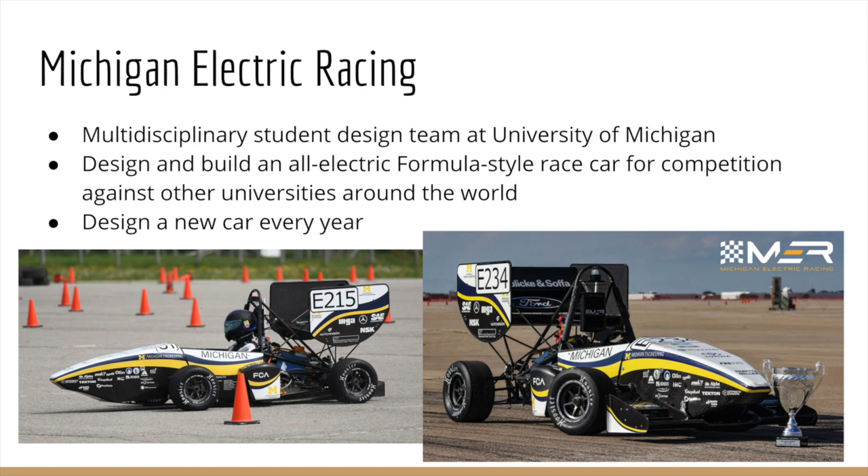As I just mentioned, I've been a member of Michigan Electric Racing during my 4 years at U of M. We are a multidisciplinary student design team that designs and builds an all-electric formula-style race car for competition. These two pictures are a car last year, and this is just to give you some more context into how I've spent my time at U of M. On that car, you could see the outer surfaces, and those were all of our composite parts.

But some composite basics. So the composite material is raw carbon fiber, and we use a woven sheet, like the picture you can see on the right. And then the other part of the composite is the epoxy, which in our case is a two-part glue. This holds the carbon fiber sheets together. For manufacturing, we layer these sheets on top of each other, and often we vary the weave direction, and then we use vacuum pressure to help cure the epoxy that we mix in between these sheets.

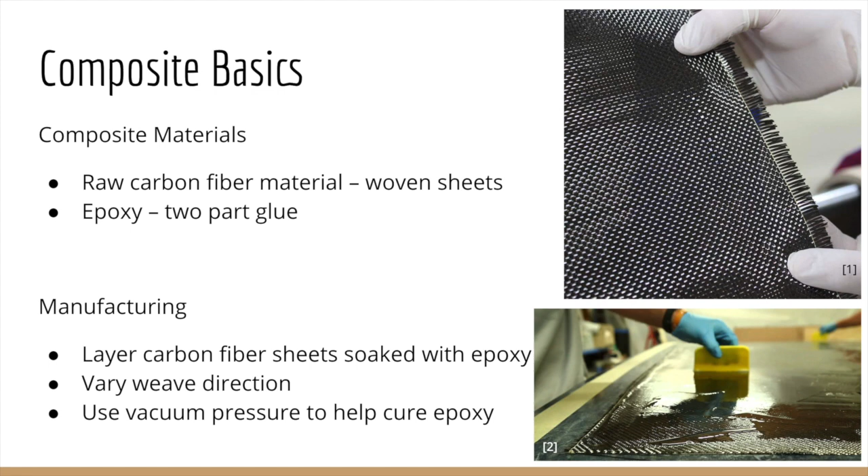A ply is a single sheet of this carbon fiber material, and then each ply has a different weave, which is the pattern and orientation that those carbon fibers are woven together. The composite is the full plies that are stacked on top of each other with the epoxy to make the final material. Material properties of a composite, specifically carbon fiber, are a little bit different than most materials.

They carry load most in their fiber direction, so along each specific carbon fiber. And then it's reinforced with the epoxy. Carbon fiber is lightweight, stiff, and then you can vary the weave directions to optimize the strength, and that's what this project focuses on.

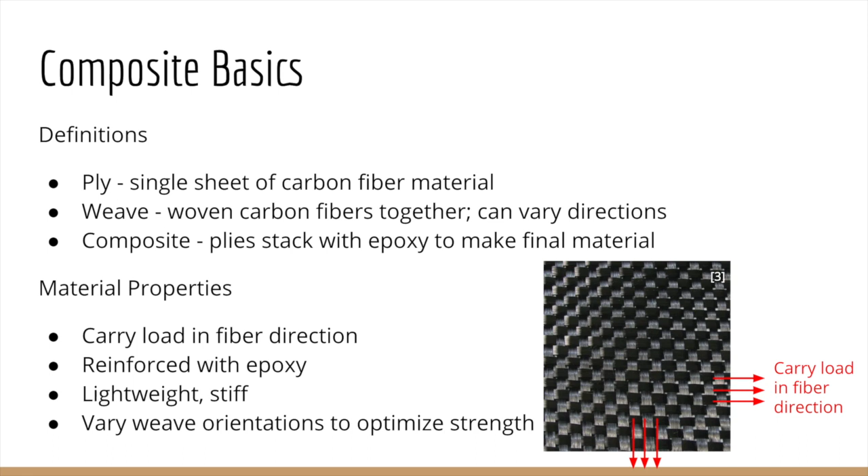For a carbon fiber layup, we are going to take different plies, like I mentioned before. So we have the 0-90 orientation, and then we can lay a 45 orientation, then a 0-90, and then a 45 on top of each other, and that's a 4-ply composite. And varying those weaves is what I look into for the rest of the duration of this project, and what I'll be going into in more detail.

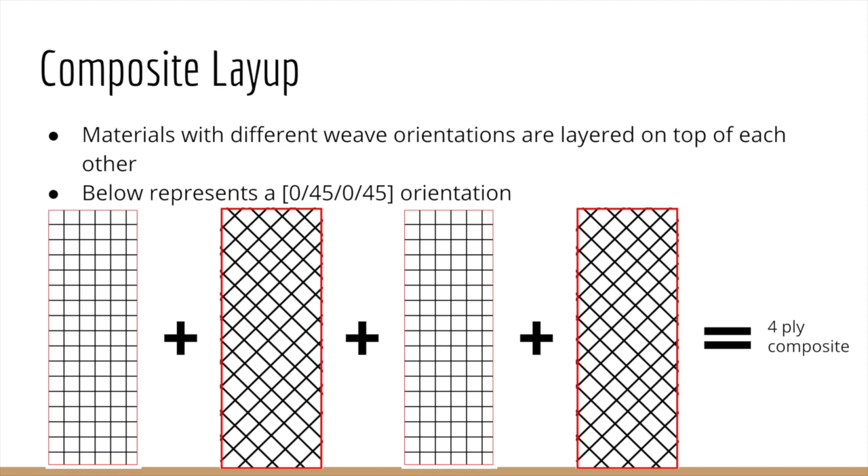Michigan Electric Racing composites: as I mentioned before, you can see the composites of the aerodynamic components of our car, or the outer surfaces. Those are less structural though, because we have a steel chassis frame beneath it. The structural composites include the steering wheel, the pedals, the steering column, and the seat, and those all have to be really strong, but we want them to be light, which is why we make them out of these carbon fiber composites.

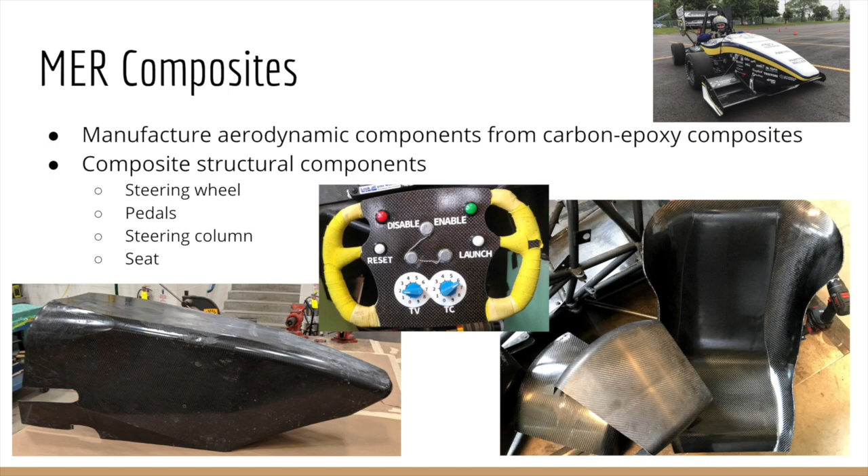As a little bit more background into why I chose this capstone project, I took a lot of composite structure classes at U of M, and it became something I was really interested in. I was interested in the strength and material properties of these components and how they can apply to our design. And I just had a personal interest in figuring out the material properties and part optimization that come with this.

Also, I was really involved in the past manufacturing for Michigan Electric Racing, and we didn't take that much consideration into the strength of our components or the weave orientation to optimize them. And I'm looking to get a significant strength increase with alternating weaves, and I know that our team is able to accomplish this, and I want to help push them into that direction. My faculty advisor for this project was Professor Heath Hofmann. He's the Michigan Electric Racing faculty advisor and our MDP course coordinator.

Initially, my capstone project plan was to do a lot of physical testing. I wanted to manufacture samples of different composites with a lot of varying weave orientations, so 0, 45s, also including some 60, minus 60s, in a lot of different patterns, and then conduct physical testing with a 3-point bend test on all these materials to see how the strengths of them compared to one another.

I wanted to develop a data book for the Michigan Electric Racing team to see which materials were the strongest so we could manufacture with those in the future and reduce the weight of our components. If we can make our components stronger with less material usage, they will then be lighter and better for the optimization of our team.

I wanted to also offset this with some simulation software so that we could validate which orientations we were using in the software before we manufactured it. I wanted to verify the component simulation with some additional physical testing so that way I could correlate the results I was getting from the simulation and the physical testing results.

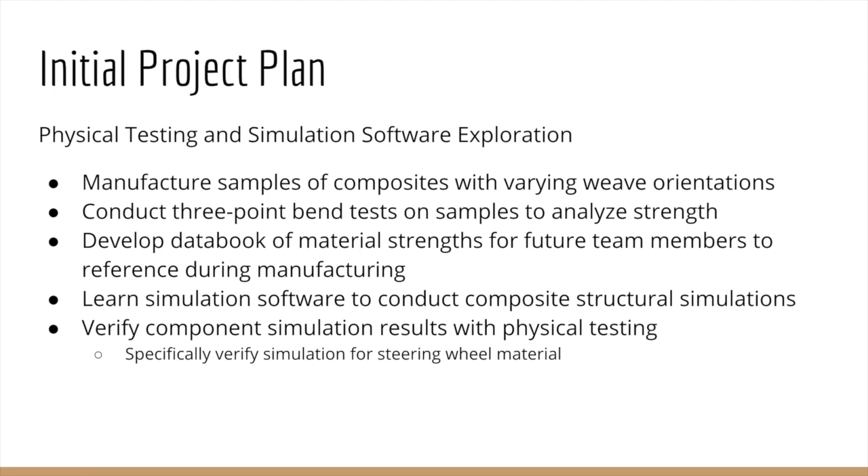Unfortunately, Corona hit and I couldn't do any physical testing. So instead, I developed an updated project plan that was mostly based on simulation alone. So throughout the year, I had been learning the simulation software to align with my initial goals, but I grew this to a larger goal of doing further simulations of composite components for our team.

I also then decided to develop documentation for the simulation software that I was using to teach other members of Michigan Electric Racing so that way in the future they could be running as many simulations as I did this year. I did develop the testing plan for the physical composite testing that I wanted to conduct, and I'm hoping that in the future additional Michigan Electric Racing members will be able to run this test and validate the data that I hope to collect.

I also started to explore FiberSim, which is another composite software, and I wanted to explore its applications to our team and develop introductory documentation as a team resource as well. I spent a lot of this year learning how to use Creo software to simulate composite structures. I was taught Creo initially by a student on a different build team, and they taught me how to establish my part geometry, my material properties, all in Creo.

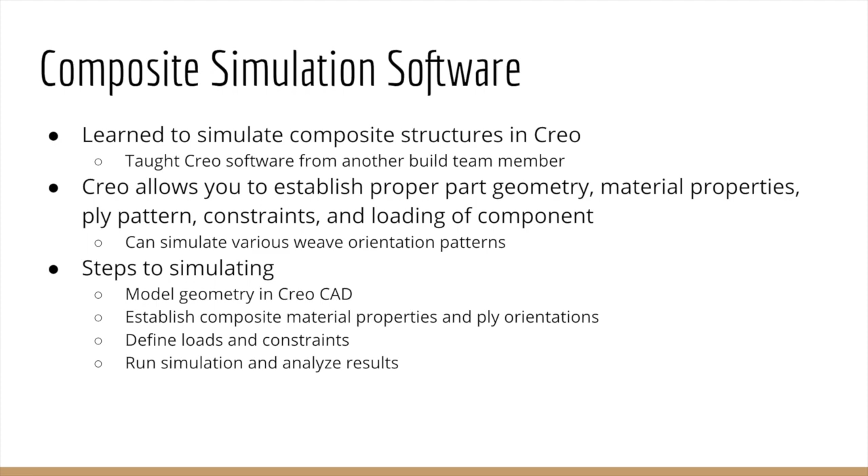So in Creo, I'm able to model my part in Creo CAD, and then establish the different composite properties as well as the ply orientations. Like I explained before, I can define a 0 ply, and then a 45 ply, a 0 ply, and define all of those so that way it will be the same way I'm manufacturing my part in real life. I then define my loads and constraints of what conditions the component is being put under, and I can run my simulations and analyze my results.

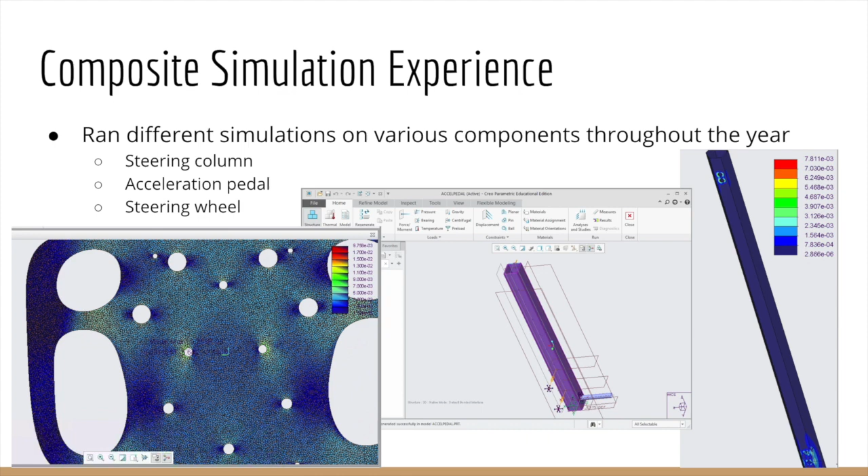These are a few components I was able to run throughout the year in Creo. So we have the steering wheel, and then in the middle there's the accel pedal, and then on the right is the steering column. The accel pedal snapshot shows a little bit of how the modeling is shown for the part with the constraints and the loading, and then the steering wheel and steering column show some of the results that I was able to get from Creo.

For the steering column and the acceleration pedal, I was modeling a composite tube that we are going to be purchasing because I wanted to make sure that this tube was strong enough to withstand the loads that both components were being put under. So the steering column was simulated with pin connections, and I applied the steering torque to the column, and I verified that the tube could support these loads. For the acceleration pedal, I simulated the foot force on the pedal and the spring loads for the retraction, and I verified that this tube also could support the load.

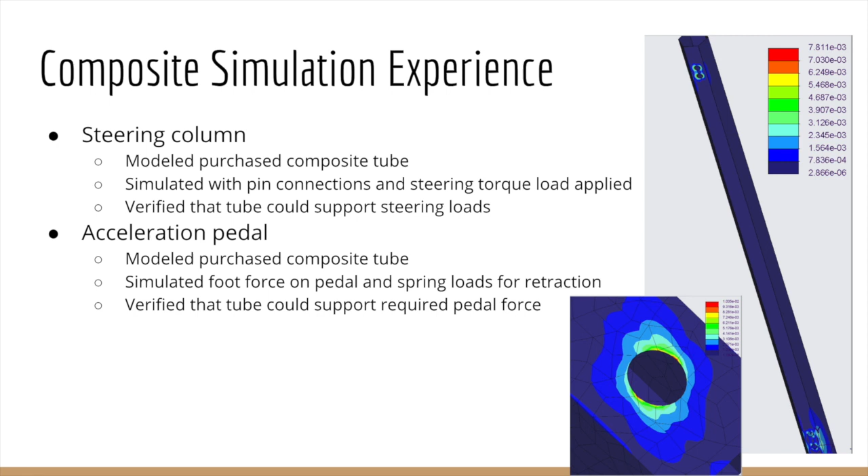Both of the images on the right show strain across the components. So the strain is the failure method for composite components, as the strain must remain under 0.017 in the components. So I analyzed that and could see that the max strain of the part on the right for the steering column is 7.81 times 10 to the negative third, which is much under the 0.017, therefore this component passes, and that's how I was able to analyze the results that I was getting.

The steering wheel analysis was a little bit different in that I was developing the ply plan for the orientations that the steering wheel would be made out of. I was hoping to optimize this plan to reduce the amount of carbon fiber that I needed to manufacture the component, but still make sure that it was strong enough to withhold the loads that we would be putting it under. My initial design had 18 carbon fiber plies, so 18 individual layers. I loaded this with the steering torque and the full driver weight leaning into the wheel.

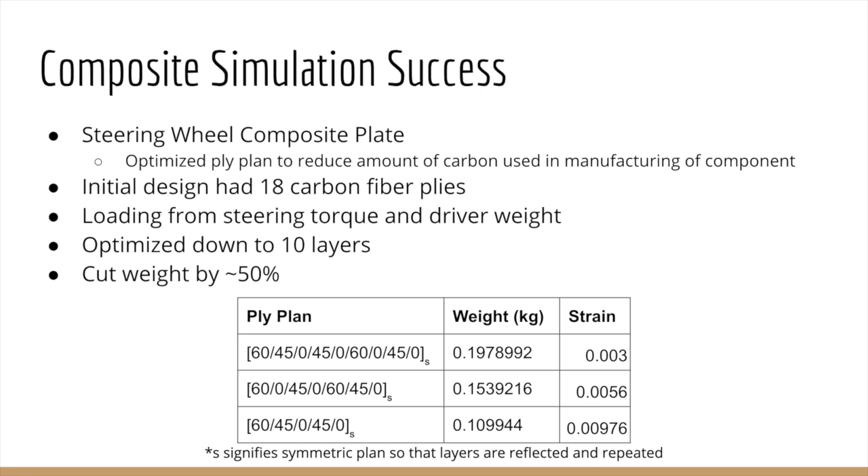Through optimization, I was able to optimize down to 10 layers, and this material was still strong enough to withhold the strain. You can see that the strain of the 10-layer component, which is the bottom row, is symmetric, so you multiply what I show by 2. The strain is 0.009, which is much under the 0.017 that I said was a failure rate, with about a safety factor of 2, which is what I was designing for. I also was able to cut weight from the initial 18 layers to the 10 layers, and it's a weight savings of about 50%, which is pretty significant in our vehicle.

From this experience simulating different parts for Michigan Electric Racing, I developed a Creo user's manual. I documented my abilities to use Creo between modeling the CAD in Creo, defining the material properties and the loads and the constraints, so that way other members can run simulations in the future.

I outlined all of this into a large document, and hopefully team members can follow along as well as reach out to me for questions in the future. I was the only one that simulated parts in Creo this year for Michigan Electric Racing, and I don't want the knowledge to leave the team as I graduate. So I'm hoping this will provide clarity and make sure that they're able to still simulate software and build off of what I was able to learn this year through this Capstone project.

The guide is currently 28 pages long, and I've been reviewing it with some team members for feedback, and my plan going forward is to have one team member walk through the entire guide and make a part to see what other gaps I'm missing and fill it out before I graduate and lose my ability to use Creo software. Ideally, I would be able to validate all the simulations that I've done with some physical testing, so that way I can prove that the simulations I'm running align with what we're experiencing in real life.

Unfortunately, because of the coronavirus, I wasn't able to conduct any of these physical tests. Still, I developed a physical test plan that would have aligned with the initial Capstone project goals. I couldn't conduct these physical tests, of course, but I'm hoping that someone will be able to run these tests later and validate my simulation software. My plan for these tests is to manufacture 12 different composites with different laminate orientations. So the 0, 45, 60s, all of those.

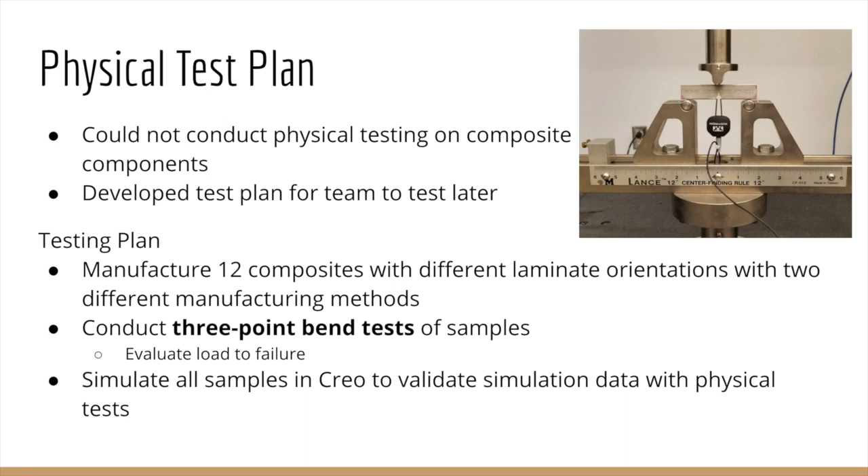I'm then going to conduct 3-point bend tests of the samples, and the picture on the right shows a 3-point bend test with an aluminum sample. This will evaluate the load to failure, and we can determine which pieces are the strongest based on how much load can be applied before they break. All of these samples will be simulated in Creo, so I can correlate the load that they can support in Creo with the physical test results.

I developed the Creo simulation for this test, where I made the strip and did a sample ply pattern, and then I applied a point force in the middle to be the point force of that 3-point bend test, and then constrained the two edges similar to how they are constrained in that diagram on the previous slide. The component on the right is shown to a point of failure of a strain of 0.017, which, as I mentioned before, is the failure strain for composite components, and that corresponds with a load. I'll compare the simulated loads with the physical test loads to see if they correlate, and then people can improve my sims from there. Unfortunately, I won't be the one actually doing this test, but that's the overall testing plan.

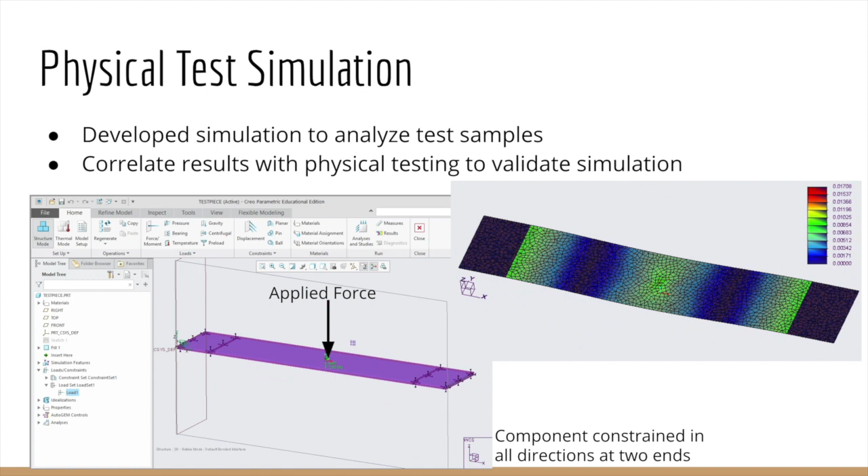The final part of my capstone project was introducing myself to FiberSim software. FiberSim is a Siemens software that is also used to plan composite manufacturing work. I can determine the ply geometries from the CAD of the part, and then use that to develop my manufacturing plans. No one on Michigan Electric Racing has ever used this software, but it's always been on our list of things to do to improve the team, so I thought I'd take a crack at it.

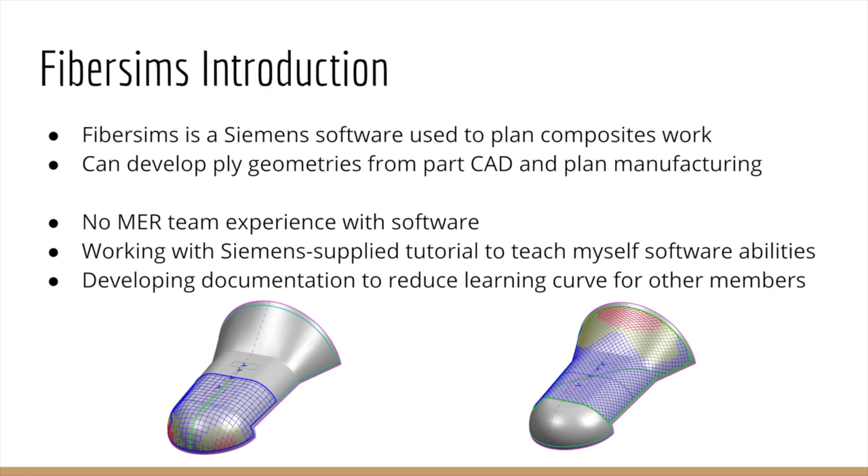I've been working with the Siemens tutorial to teach myself the software's abilities, and then I've been developing a user's intro guide for the team. I'm hoping to just shorten the learning curve to using FiberSim. I recognize that I can't get that much depth into the software this late in the year, but hopefully the work that I've put in, where you can see that I've been able to lay some plies down on a part, will help jumpstart other team members to using it and improving our team in the future.

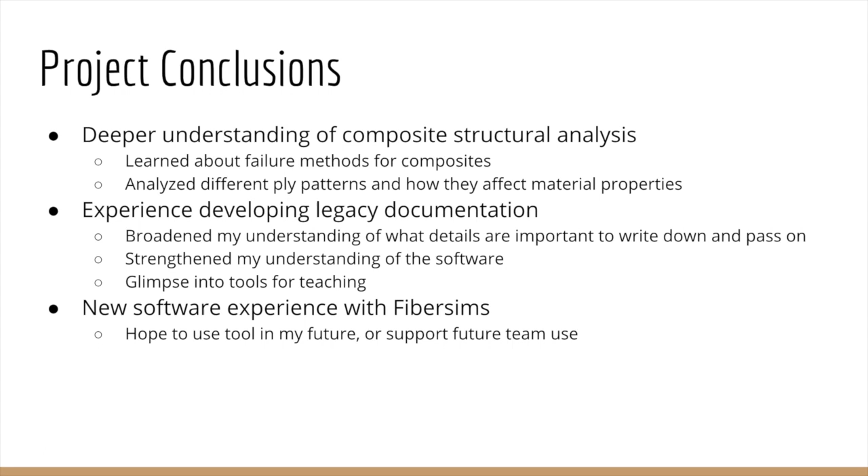From this project, I've been able to grow a deeper understanding of composite structural analysis. I learned more about the failure methods for composites and also how to analyze the different ply patterns and how they affect material properties. I worked a lot with the software, and I have a much better sense of how to use it and how to dictate my design based on the conclusions I'm able to draw from simulation software. I also experienced developing legacy documentation for the team. It broadened my understanding of what details are important to write down and pass on while I'm learning software, while also strengthening my personal understanding of the software.

There's still a lot of remaining work though, as I wasn't able to do any physical testing. So I want to finalize my Creo user's guide and continue to grow my FiberSim introductory documentation, but mostly I want to support the team of Michigan Electric Racing on their composite structural designs and manufacturing in the future. I want the team to be able to run my tests and validate my simulations and do all the physical testing that I wasn't able to do this year.